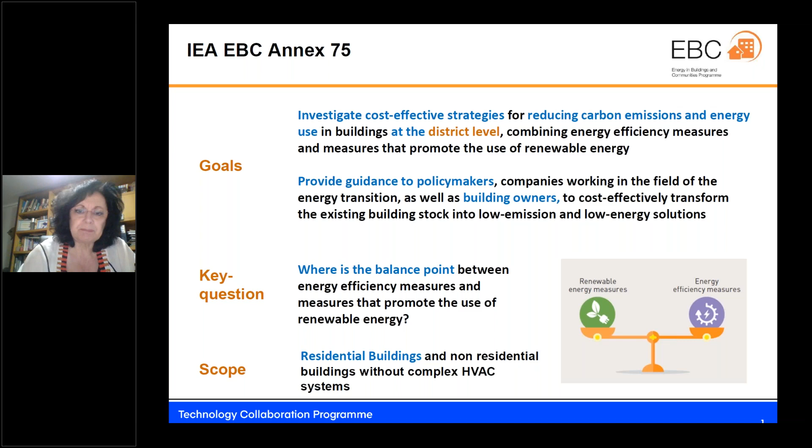Renovation at the district level can bring opportunities, but can also be very challenging when compared to building level. Finding this balance between renewable energy supplies and energy efficiency measures for the renovation of the existing stock is much more complex at district level than for individual buildings, but may also bring larger benefits. In this context, we thought it would be important to explore the potential of cost-effective renovations at district level to accelerate the transition towards low emissions and low energy districts.

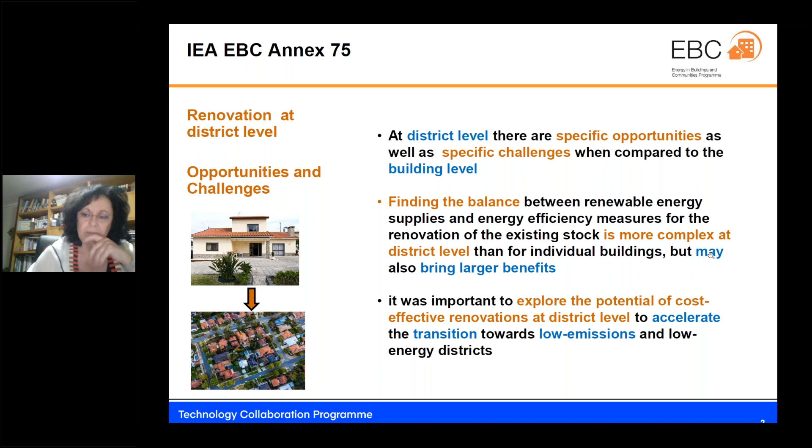With this in mind, we defined a few specific objectives: first, to give an overview of existing and emerging technology options for cost-effective renovation strategies. Also, to define a methodology supported by one or more tools to identify these cost-effective strategies for the renovation of urban districts, combining energy efficiency measures and renewable energy measures. Also to identify and document good examples, as well as explore case studies, highlighting the strategies for an effective transformation of the existing districts into low energy, low emission districts. And finally, our major goal to provide guidelines for policymakers and also for building owners and investors.

In the years we worked together, we produced 13 reports, and we have also developed a supporting online tool and an online interactive map where selected case studies are analyzed to understand the problems and opportunities faced in different district renovation processes. You can find all these reports and the tools on our website, so I invite you to visit this website and explore the different reports we have there.

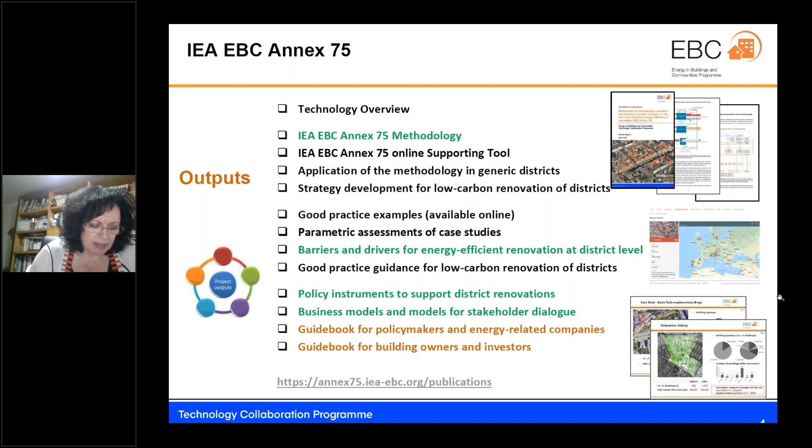The next speaker will be Romain Bolliger, who will talk about the methodology we developed in this project and its application to a case study. So Romain, please, you can proceed with your presentation. Thank you.

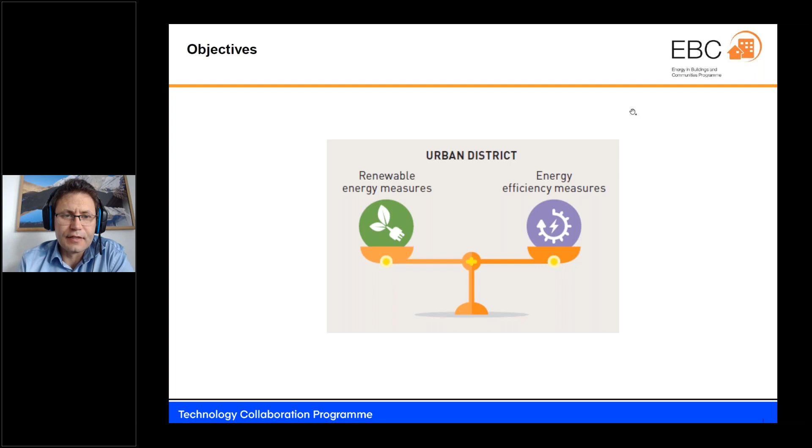One of the main points we were looking at in Annex 75 has been this balance between energy efficiency measures and renewable energy measures. In terms of research questions, it's specifically the third one in our list that we have been looking at: whether in district heating systems, the same level of efficiency measures make sense compared to individual heating systems. One could assume, for example, that since district heating systems have a large amount of fixed costs, it wouldn't matter that much how much we do on the efficiency side, so it could be assumed that in district heating projects there is less potential for energy efficiency measures.

We want to take a look at that more closely. Associated to that is also the question whether it makes sense at all to carry out district heating projects or district projects compared to individual building renovation projects in terms of cost effectiveness, and the larger question of what are cost effective combinations between renewable energy measures and energy efficiency measures at district scale.

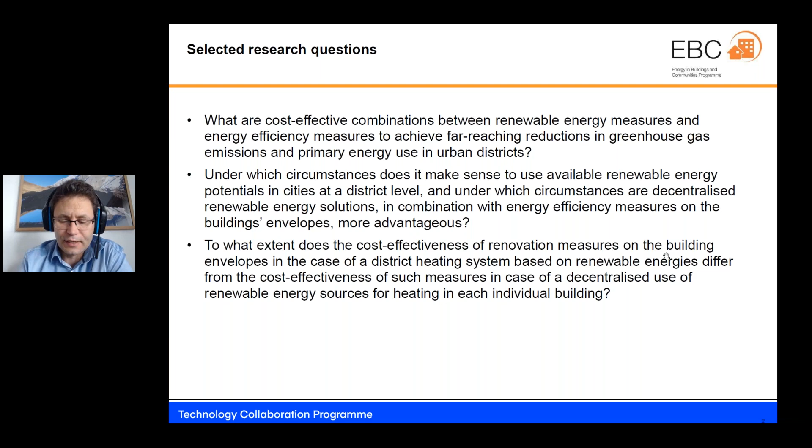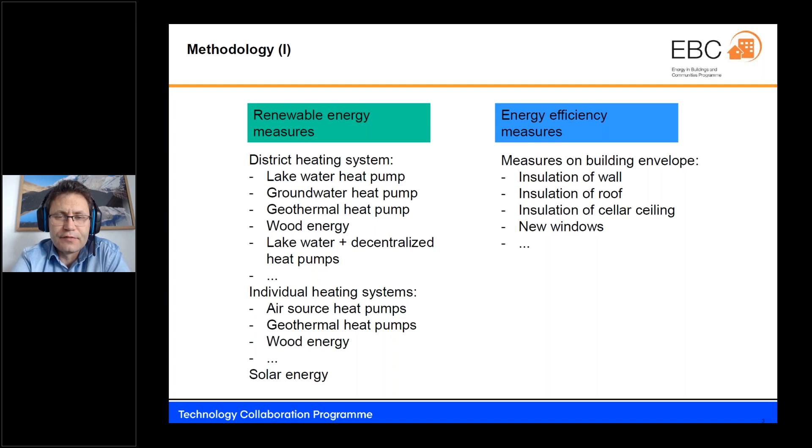To investigate these questions, we defined a set of measures, both on the renewable energy side and on the energy efficiency side. One important point to note is that when we look at cost effectiveness, it's important to always look at it in comparison with the reference scenario.

If we just compare before and after the renovation, we miss an important aspect, because even if we don't do anything to improve the building energetically, we still have costs in the so-called anyway case, just to restore the building's functionality. So when we talk about cost effectiveness of building renovation measures, it's important to note that not all of those costs are really necessary to improve the energy performance — some of those costs are already necessary just to restore the building's functionality. We look at cost effectiveness always in comparison with what would have to be done anyway.

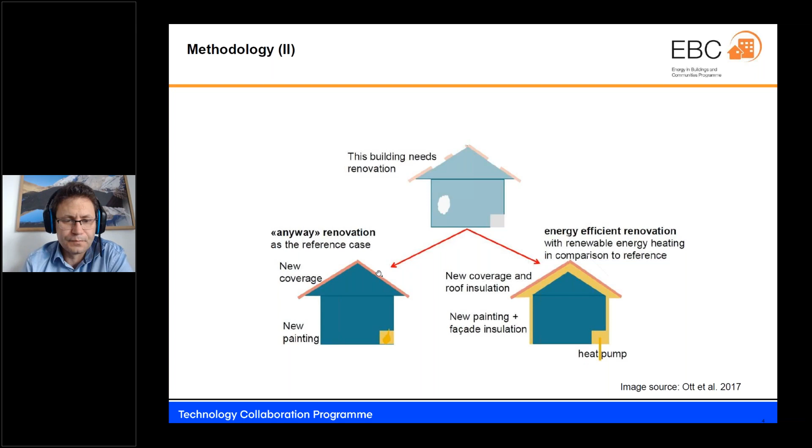When we look at the question of what elements a district heating system has in terms of how efficiency measures may influence the cost of the entire system, we distinguish four main elements: the heat source intake of a district heating system, centralized heat generator, pipes, distribution system, and individual heating substation, in principle.

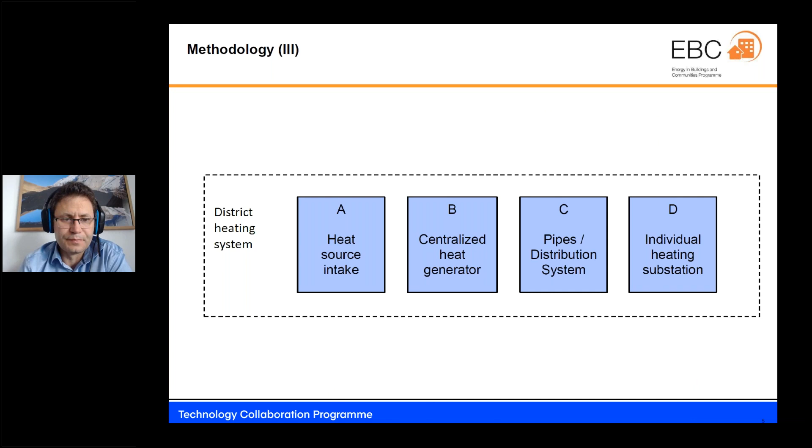There were several case studies carried out in Annex 75. Some success stories were also documented, and I'm going to talk now about one to illustrate the methodology, based in Lucerne, on a group of around 18 residential buildings.

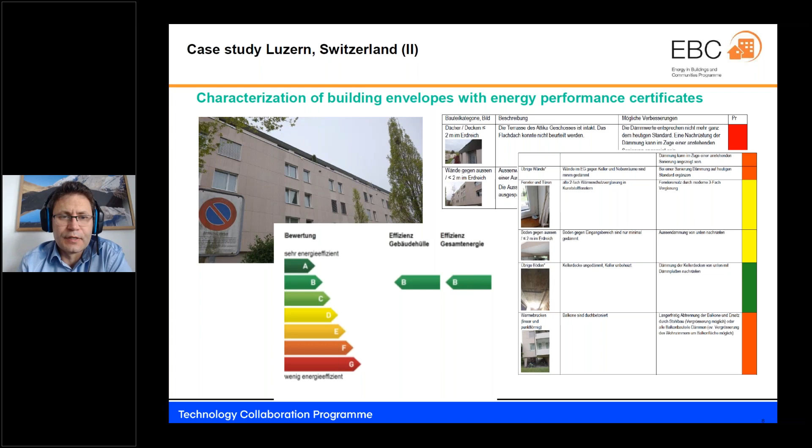When we were carrying out this case study, we started by carrying out energy performance certificates for most of these buildings, just to get a better understanding of their energy performance as a basis for further calculations. We were also obtaining cost data on energy and heating projects.

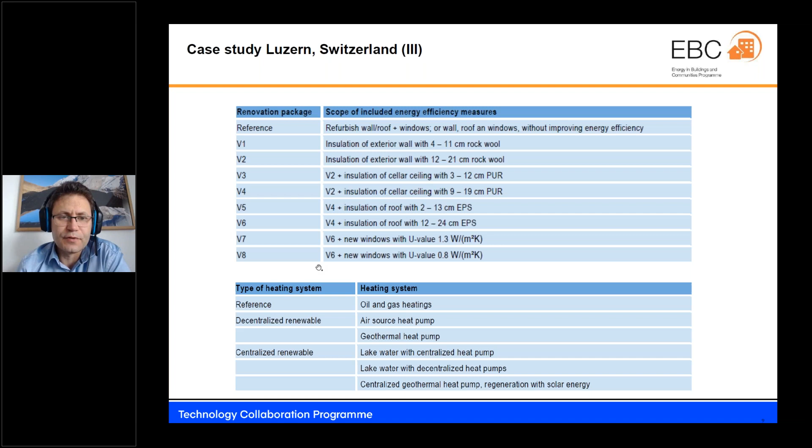We were defining various sets of combinations of energy efficiency measures on the building envelopes, ranging from just a reference case with only restoring the building's functionality to a comprehensive renovation package including windows, roof, cellar ceiling, or exterior wall insulation. We applied these energy efficiency measures to scenarios with various types of renewable energy systems, both centralized and decentralized.

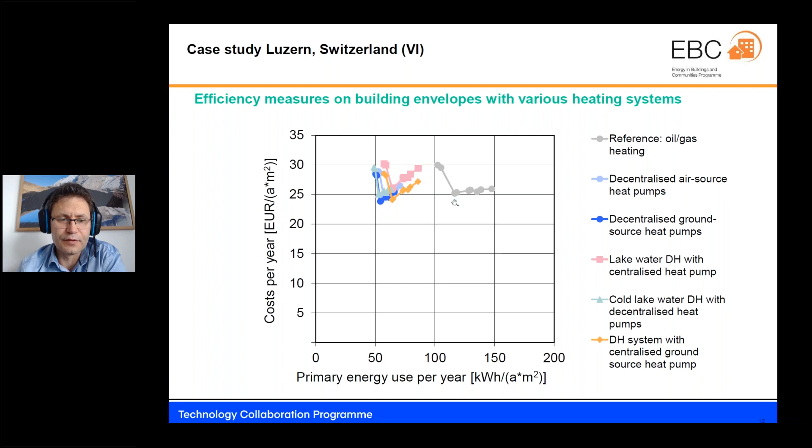This can also be illustrated in this type of graph, where the renovation package V6 remains the most cost optimal for various heating systems.

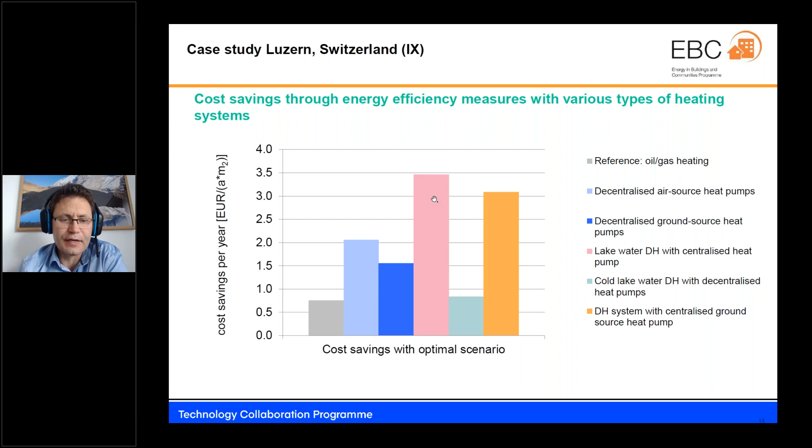We observed in this case study that lake water district heating with a centralized heat pump basically had the highest cost savings in terms of energy efficiency measures, higher than the reference case, but also higher than other renewable energy systems. This can also be seen in this graph when we have no efficiency measures on the building envelopes - the district heating system is quite more cost intensive than the other solutions. Yet if you apply efficiency measures, it becomes more leveled out.

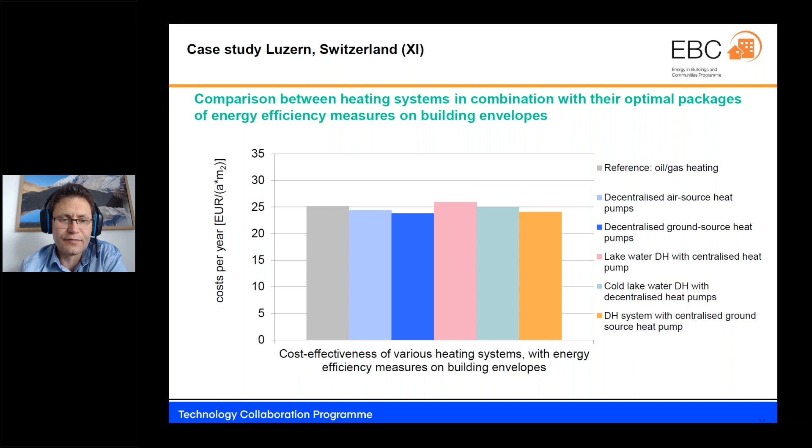So from this case study, the conclusion has been that for all investigated renewable energy systems, the energy efficiency measures on building envelopes are at least as cost effective as with a fossil fuel-based heating system. Moreover, for individual heating systems and for district heating systems, the same package of efficiency measures on the building envelopes is most cost-effective. The cost effectiveness of various investigated heating systems is relatively similar.

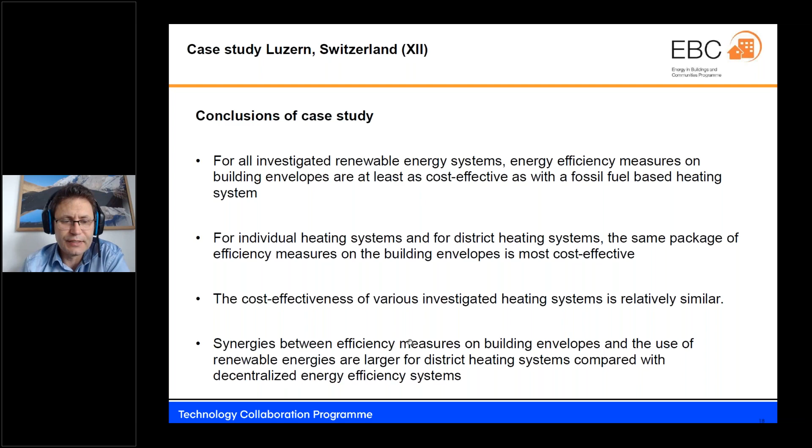We also saw in the graphs that there were some trends in this case study showing that synergies between efficiency measures on building envelopes and the use of renewable energies are larger for district heating systems compared with decentralized energy efficiency systems.

When we were looking at strategy development, we distinguished basically four questions that can be interesting to ask oneself when developing a plan for how to renovate a district. The first question is to take a look at the starting condition, whether there is already an existing heating system, centralized or decentralized. Then, what kind of production and distribution concept is foreseen for the new solution in terms of energy provision, then to choose the technology of the related heating or cooling system, and then also to ask oneself how much to carry out energy efficiency measures in association with the related heating system.

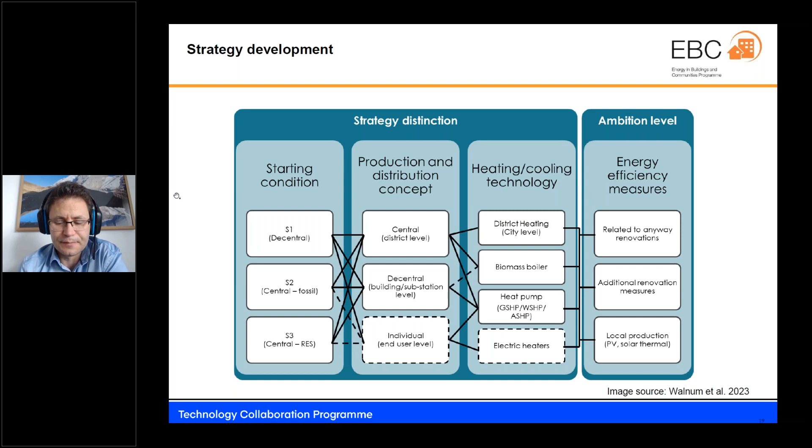Some selected conclusions for strategy development: first, there is no one-size-fits-all solution, so each district has to be investigated individually. The best solutions depend on the starting situation of the district, such as insulation levels and associated energy needs, the available already existing heating systems, and available energy sources.

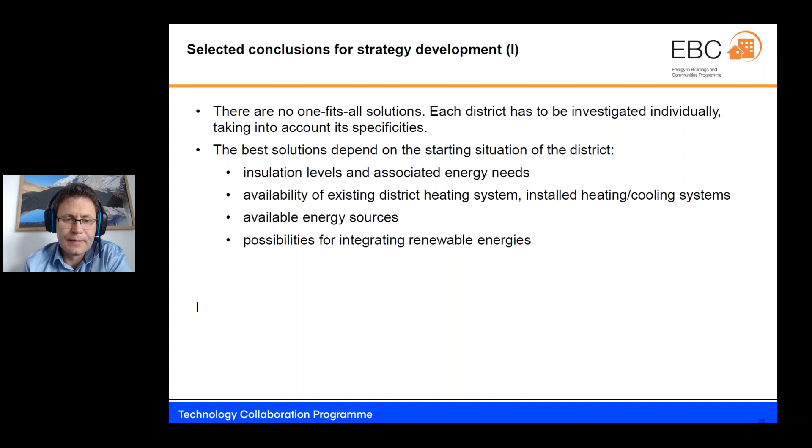In terms of the main question I mentioned at the beginning, the balance point between energy efficiency and renewables, we gave this recommendation: energy efficiency measures make a lot of sense also with district heating systems. There are synergies available, so it's not the case that energy efficiency measures don't make sense at district heating level.

So there are a lot of synergies, and one important factor is that the temperature of the district heating system may be lowered if energy efficiency measures are carried out, which doesn't only reduce losses in the system but also allows the centralized heat pumps to run much more efficiently if the temperature can be lowered a little bit. They already are not so efficient because the temperature is relatively high in a district heating system, as it has to accommodate all types of buildings. Yet by carrying out energy efficiency measures, it's possible to reduce that temperature level, and this can be quite an important factor.

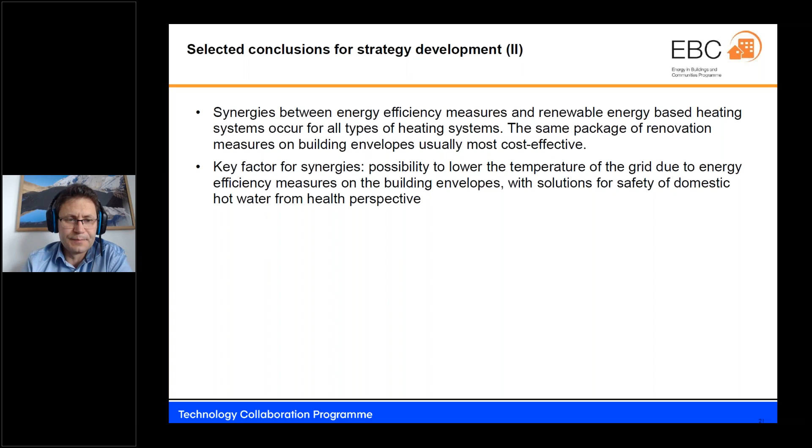With regard to the other point I mentioned, whether it makes sense to carry out district heating projects at all, we saw that the difference between renewable energy systems at district level and at individual level are quite small. We also have to take into account that there are a lot of risks involved in district heating projects, because a lot of upfront investments have to be made, and it's not clear whether the project is going to be successful. So there is no clear economic case often for district heating projects.

On the other hand, we identified a lot of other good reasons to carry out centralized projects, for example, to make use of a large heat source or seasonal thermal storage, to have more flexibility, to reduce the burden on the electricity grid, or to provide a heating solution to buildings for which it is difficult to switch to renewable energies, for example due to noise or space restrictions in cities. Yet these additional benefits are mostly like public interest benefits.

So one main conclusion has been that if policymakers want to make use of the related benefits that district projects bring, policy action is most likely to be needed to make such projects happen, because the market all by itself is unlikely to deliver district solutions to a large extent.

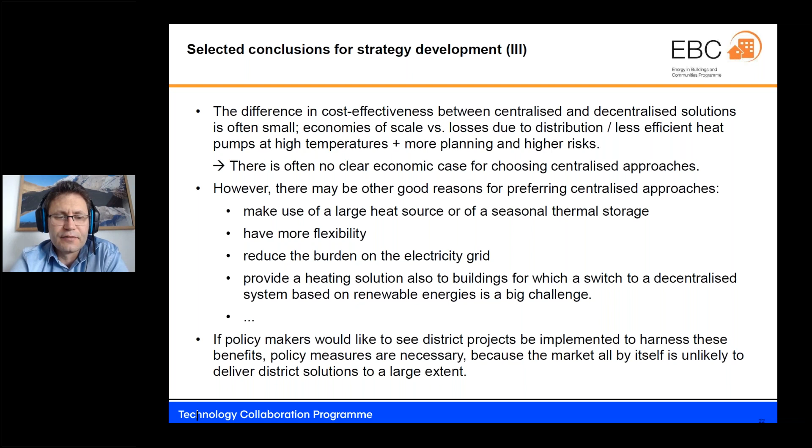This brings me to the end of my presentation, and I gladly hand over to Erik Johansen from Sweden.

Thank you, Roman. So I will continue and talk about the barriers and drivers for energy efficient renovation at district level. In this part of the research, we looked at a few research questions related to energy efficient renovation at district level: what are the main barriers and drivers concerning this, what barriers must be overcome to achieve successful renovation, and what are the most important drivers enabling renovation?

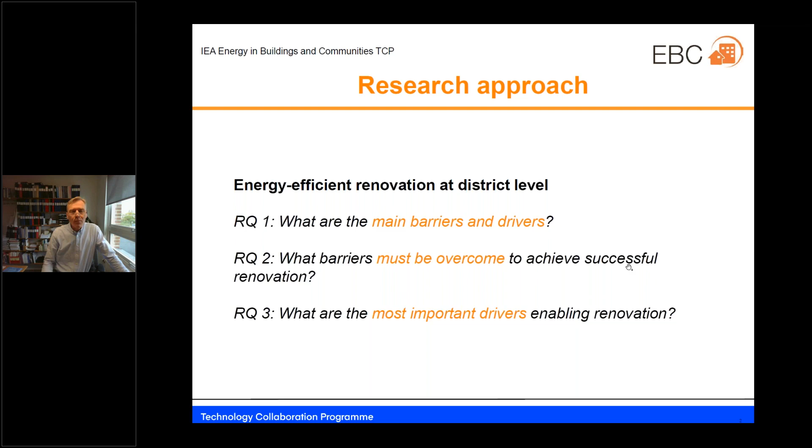We did an analysis of 15 success stories, which were recent renovation projects at district level, and we also conducted 38 interviews with different stakeholders within the annex. As Manuela mentioned in the beginning, several European countries were involved in this study, representing Northern Europe, Central Europe, and also Southern Europe, so it's quite a good spread over Europe.

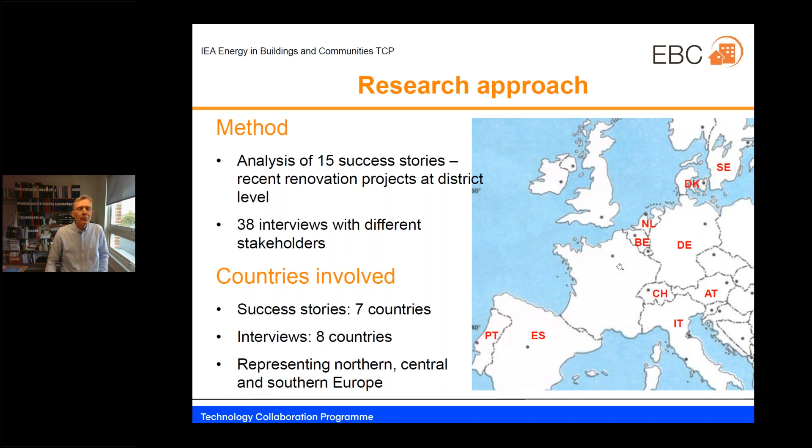The type of stakeholders that were interviewed were policy actors, so authorities, public agencies, etc., renovation solution suppliers, energy solution suppliers, clients and beneficiaries—which included investors, residents, as well as homeowner and housing associations—financing intermediaries like banks, real estate developers, and also what we call other intermediaries, including neighborhood associations, consultants, and lots of other stakeholders.

And the barriers and drivers that were found could be divided into different categories: policy aspects, legal aspects, economic aspects, social aspects, communication, technical aspects, and finally knowledge and training. So we'll go through the results here when it comes to barriers and drivers, starting with the main barriers.

If we look at policy aspects, we could find that there was a lack of synchronization between authorities at local, regional, and national level. Local authorities often lack financial and human resources and technical expertise. This is especially true for small municipalities. It is often difficult for municipalities to influence private actors and homeowner associations.

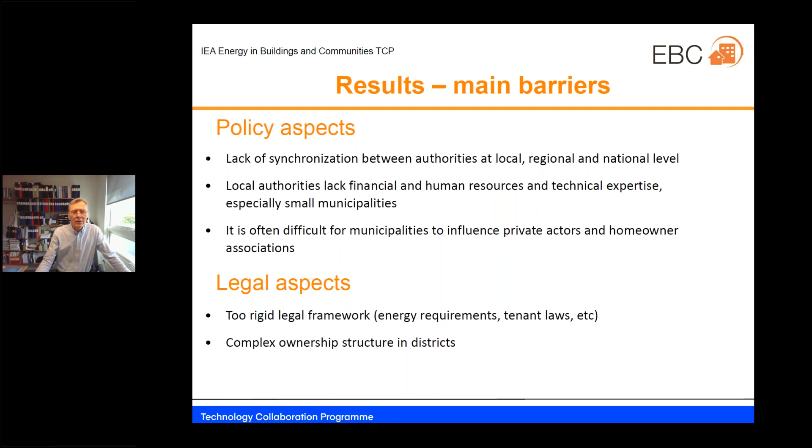When it comes to economic aspects, one barrier was the lack of financial incentives, especially at district level. Another barrier was the lack of financial support to low-income people, which is a vulnerable group and difficult in district renovation. And also that private homeowners do not want to take loans.

For social aspects, one barrier was the risk that low-income people need to move from the district, so this vulnerable group is very sensitive, for example, to increases in rent, which may be a consequence of the renovation. Another barrier is the lack of trust in authorities and other actors involved in energy renovation.

When it comes to communication, a barrier there is the poor dialogue and coordination between stakeholders, and also lack of adequate advice and guidance.

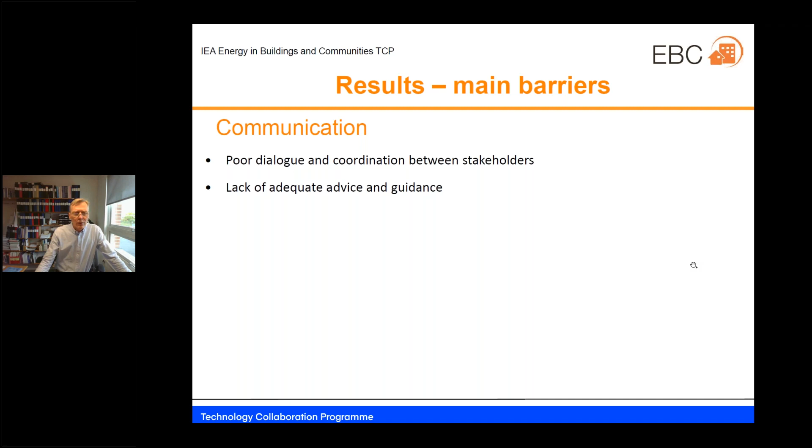When it comes to technical aspects, a barrier is the difficulty for residents to switch from individual to centralized installations, and also that there is a great variation in the technical condition of the buildings in the district.

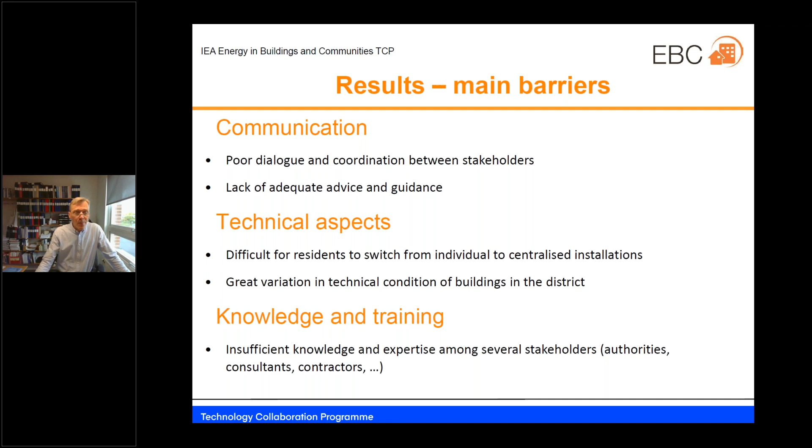And finally, when it comes to knowledge and training, one main barrier was the insufficient knowledge and expertise among stakeholders, including authorities, consultants, contractors, etc. Those were the main barriers that were found.

And moving over to the main drivers, starting with the policy aspects, it was found that local authorities and municipalities can play a decisive role as drivers in the process.

They can, for example, act as coordinating actors to reach many stakeholders. They can develop visions, energy strategies, and tools. They can organize consulting and awareness campaigns. They can improve the outdoor environment in the districts. They can facilitate necessary permissions, like building permits, and provide funding frameworks for homeowners and housing associations.

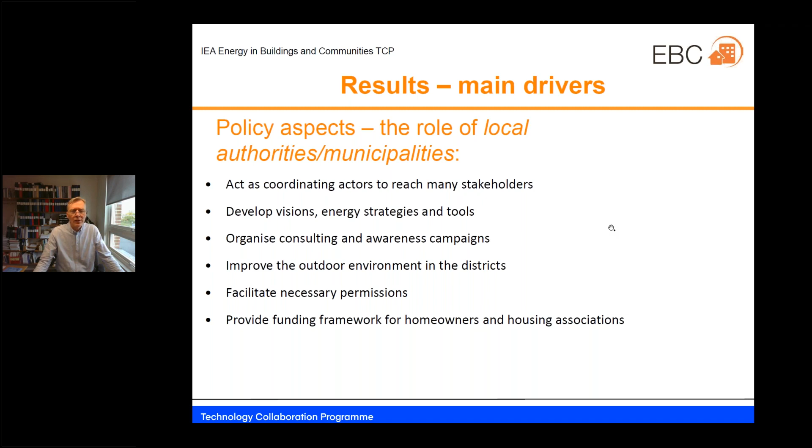As for economic aspects, the use of bank guarantees and revolving funds could be an important driver, as well as economic incentives to encourage a shift to carbon-free energy.

Another driver is financial help, special financial help to low-income groups, and also the change from individual heating of each building to district heating, which is related to economy of scale.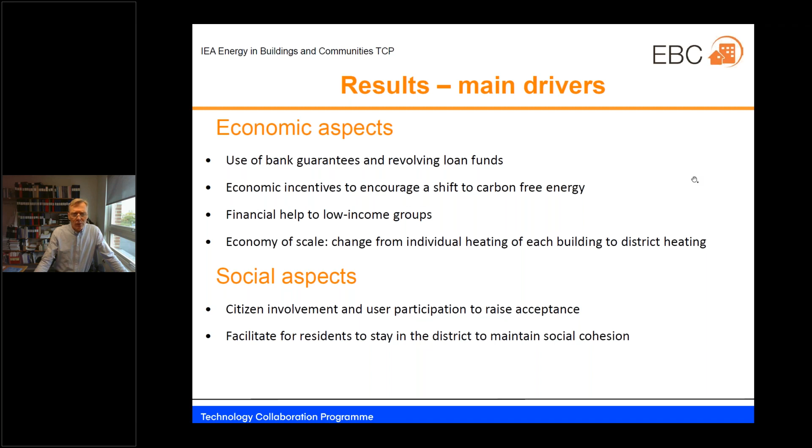And as for social aspects, an identified driver was citizen involvement and user participation to raise acceptance, and also to facilitate for residents to stay in the district in order to maintain the social cohesion in the district.

When it comes to communication, the main driver was found to be that advice and guidance to involved actors during the whole renovation period. A good stakeholder dialogue throughout the project, for example through thematic workshops, and a good dialogue between the local authorities and citizen groups in order to build trust.

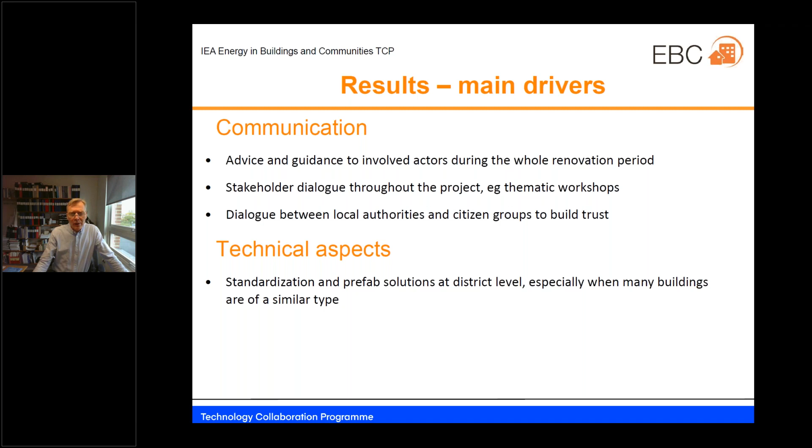Of the technical aspects, an important driver is the standardization and prefab solutions at district level, and this is especially important and possible when there are many buildings of the same type.

And finally, when it comes to knowledge and training, a main driver was the training of key actors involved in different parts of the renovation.

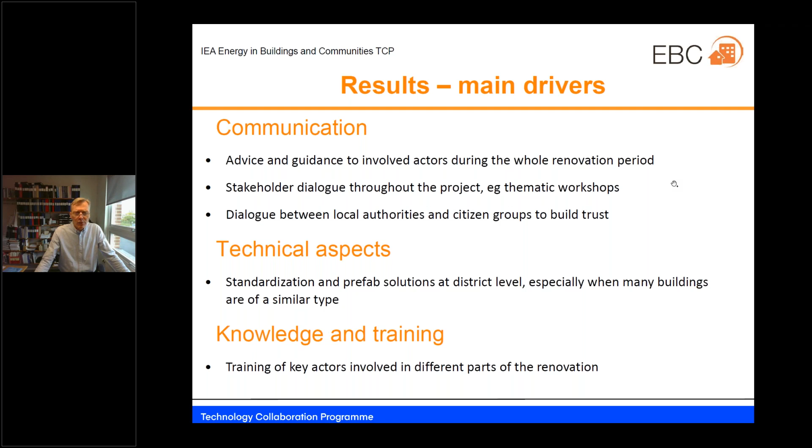So to end here with some recommendations and conclusions that were found from this study about barriers and drivers.

It's recommended to have a holistic approach to district renovation, so combining energy renovation with upgrading of the district, for example improving outdoor environment and social infrastructure. This will help to create trust in the renovation process of the district.

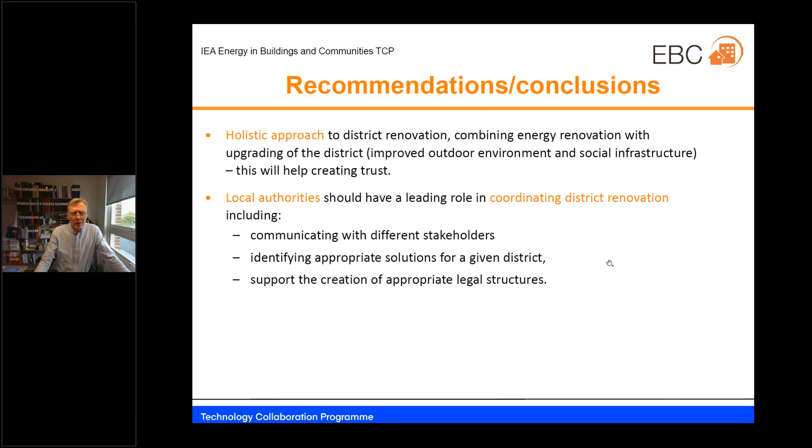It's also recommended that local authorities should have a leading role in coordinating district renovation, for example communicating with different stakeholders, identifying appropriate solutions for a given district, and supporting the creation of appropriate legal structures.

Another recommendation is that public housing associations, in cases where they exist in the country, can play an important role in the energy renovation, especially if the municipality has ambitious goals when it comes to energy efficiency and the use of renewable energies.

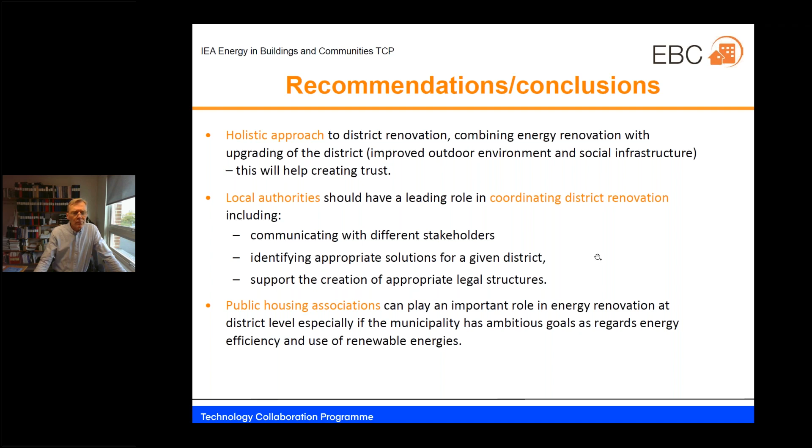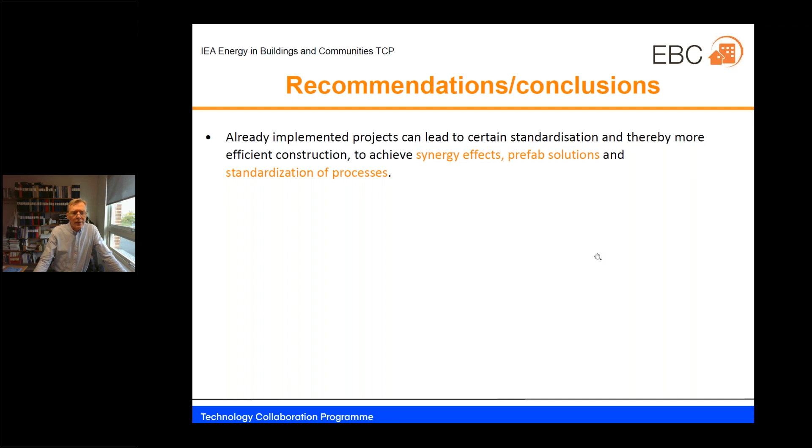Another recommendation is that already implemented projects can help in identifying certain standardization and thereby more efficient construction, in order to achieve synergy effects, prefabricated solutions, and also standardization of the processes.

Finally, best practice examples constitute a good way to encourage the spread of renovation at district level. This can be either by starting with a single building and upscaling it to the whole district, or spreading good district examples to other districts. One could also include learning from one country to another when it comes to best practices.

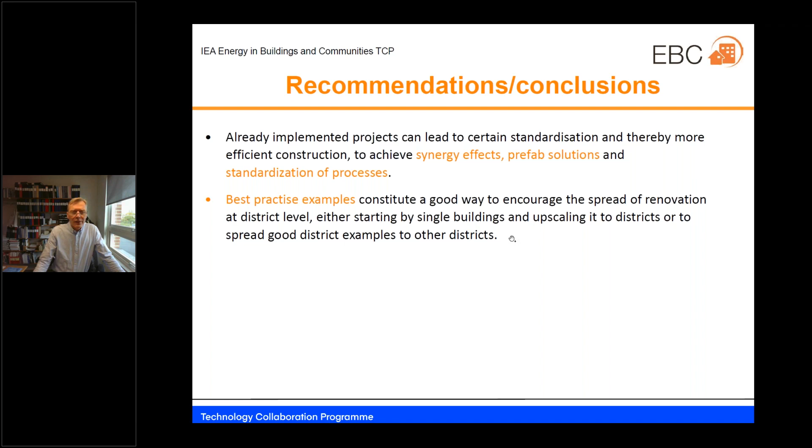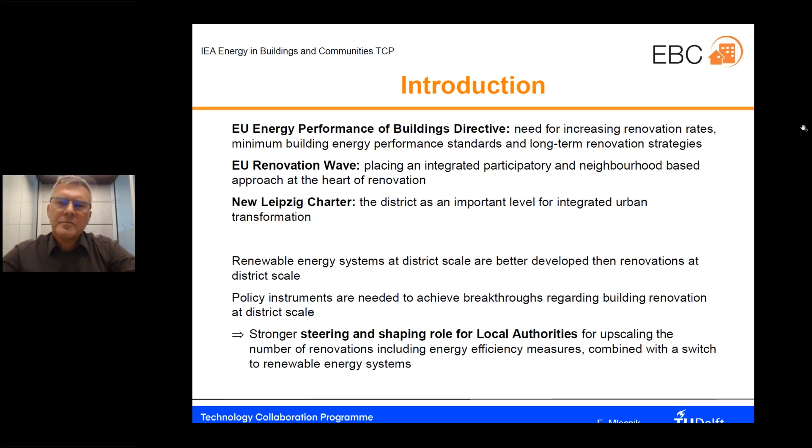So in this work, we have been focusing on the policy instruments. The question was: how can policies, especially those deployed at local level, increase residential building renovation and renewable energy systems at district levels.

This report is structured in various parts. First of all, there is a catalog of possible and available policy instruments. There are results mentioned from interrogations during workshops and during in-depth interviews in eight countries.

There's a part that deals with a quantitative assessment on the degree stakeholders think that proposed policy instruments can be useful, important, and easy to implement. And there's a qualitative assessment, especially also looking at country differences and lessons from other countries.

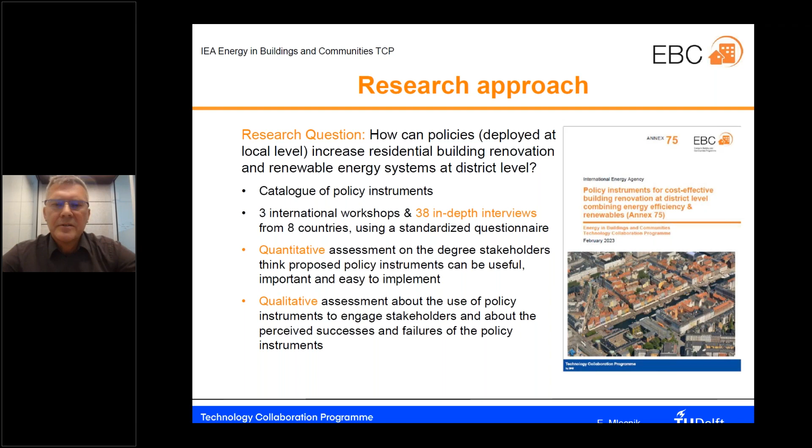Coming to the catalog of policy instruments, usually we think about sticks and carrots, regulations and incentives. So these were also detected, but besides that, there are other categories of policy instruments that become very important, such as planning and tendering for districts, organizational instruments, communication instruments, and other emerging initiatives that might help district development.

Regarding regulations, it would be possible to enforce minimum energy standards in districts. However, this can be very complicated and it's not a very popular measure for politicians to do. There can be inspections and audits in districts, especially when there's a concern about livability in a district and the quality of social housing. There might be financial incentives created by local authorities for districts as a supplement to existing national incentives.

But let's maybe focus more on the other instruments that are interesting. So I will give one example of a bottom-up approach and one of a top-down approach, looking at how we deal with this in the report, systematically describing barriers and opportunities related to each policy instrument.

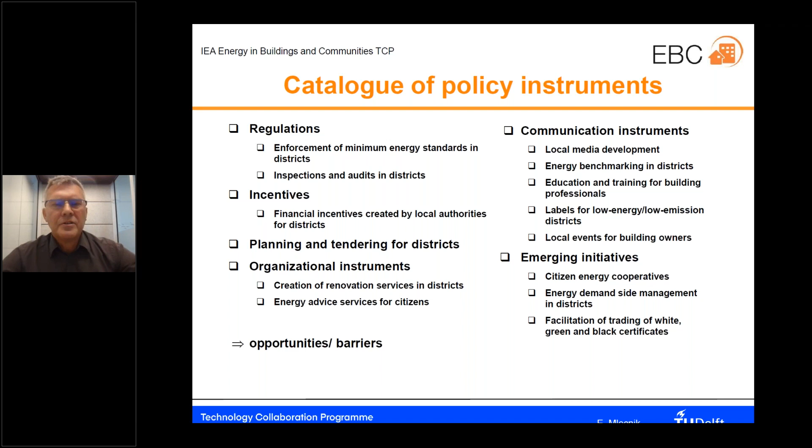For example, a top-down approach, local authority planning, actually has a great opportunity to combine the energy efficiency issue with the development of energy grids at the same time. However, most of the heat plans being developed now do not take into account energy efficiency of the buildings. Neither do they have obligations to go to low temperature heat grids, for example.

A big advantage could be that there's professional top-down planning with experts. On the other hand, participation processes are still needed to gain acceptance within the neighborhood. There's an opportunity for performance-based tendering to specify the energy performance of a district, and with such planning, there might be a good legal basis to start actions.

On the other hand, there are still barriers, as Eric also mentioned. There's also a gentrification risk. Once we start renovating a district, people might move to other districts, and we can lose the social cohesion.

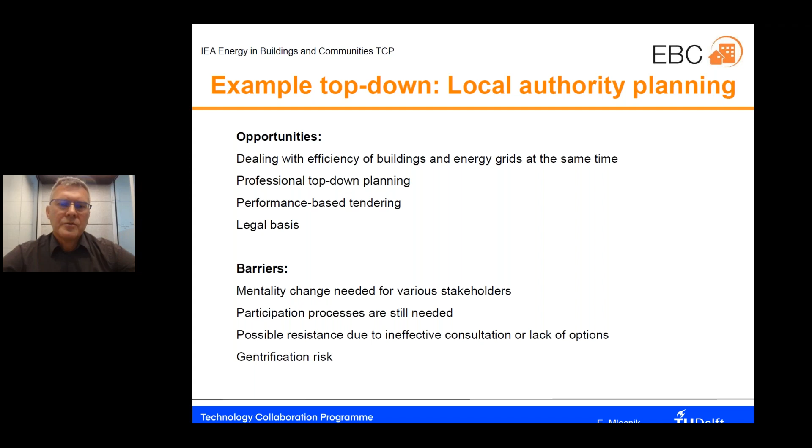To give an example of a bottom-up policy instrument: developing a consultancy desk in a district to give energy or sustainability consultancy. The big opportunity is that you can really focus on engaging citizens and unburdening homeowners. You can target multiple owners at the same time, while gaining the trust of these owners with independent advisors or people from the neighborhood itself giving the advice.

There's an opportunity to raise individual awareness and provide easy access to solutions for individual homeowners, and an opportunity to create alliances on the local level, also for supplying renovation and energy solutions.

On the other hand, it can be very tricky for a local authority to procure such a service, like an advice desk. Tendering processes are quite experimental, and the activity itself can be very labor intensive.

Another barrier is that the service does not necessarily target a specific district or customer segment. For example, there might be a general consultant who is not specialized in legal issues of condominium associations.

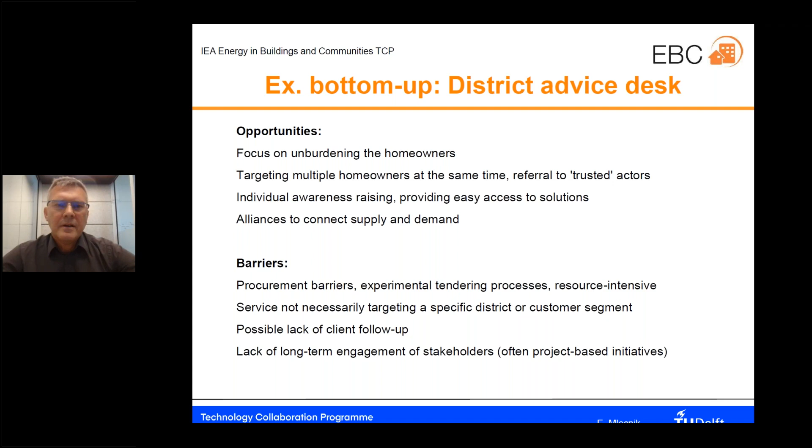This is how we deal with these issues in the report from the catalog part. If we look at the quantitative analysis in the report, we asked about policy instruments similar to those mentioned in the poll, asking if interviewees were using these instruments, interested in them, thought they were important, and thought they were easy to develop or implement.

The interviewees were all experts in their field, experienced with some aspect of district renovation. 62% had direct experience, 72% valued the policy instruments as important or very important, and about 25% considered them easy or somewhat easy to implement. So the problem here is that while most of these instruments are very relevant for targeting district action, they might be difficult to implement.

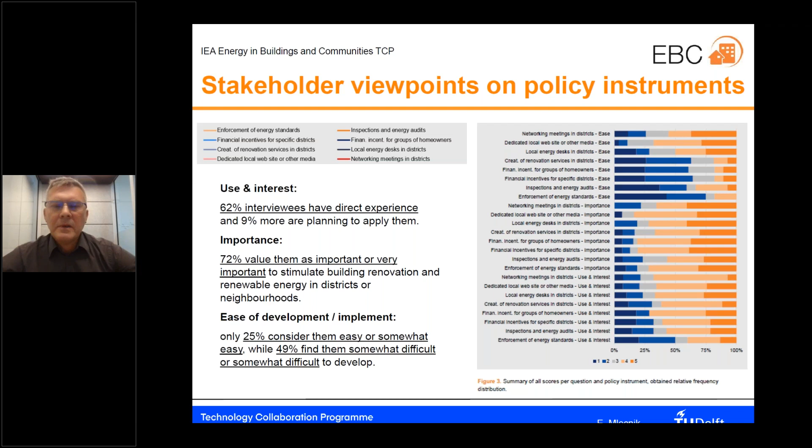We also found a difference in opinion between policy actors and non-policy actors. Here you can see on the x-axis eight policy instruments we focused on, and the importance rating. The orange line is the importance rating by policy actors, and the blue line by non-policy actors, mainly market actors. You can see that policy actors are more inclined towards the easy measures, such as developing websites or communications.

They find these more important, while market actors really emphasize that obligations are also needed. So inspections and energy audits are found more important by non-policy actors than by policy actors.

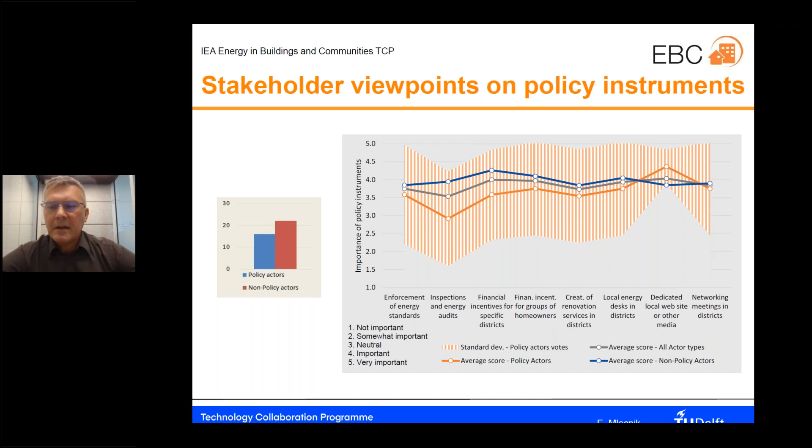The last part of this report is about a country discussion, and there we can clearly see that countries can learn from each other's successes and failures. We have good examples and also less successful examples we can learn from.

For example, in Austria there are district management offices that can take care of energy-related renovations, a nice example in Vienna. In Belgium, they had experience introducing a financial incentive for neighbors to renovate together. However, this did not lead to the expected outcome that people in the same street or district would also apply for such a grant.

In Switzerland, there are interesting examples of cantonal subsidies as well as obligations for switching to renewable energy-based heating systems, and also voluntary energy performance labels such as Minergie and the 2000 Watt areas that can inspire further policy development.

In Germany, we found the KfW (Kreditanstalt für Wiederaufbau) grant very interesting, which specifically focuses on urban development of districts, and we found that many local authorities use this grant coupled with regional and local add-ons and incentives.

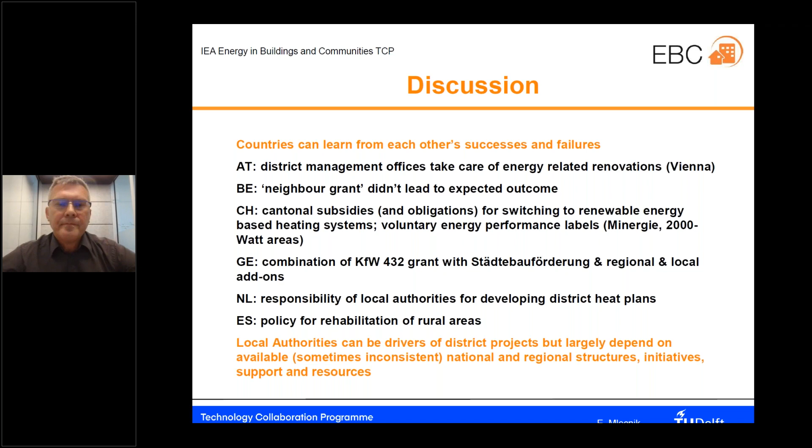That brings me to my conclusion. We found in the policy studies that the district scale approach can lead to upscaling of energy renovations, but it comes with important local and social challenges that can be addressed with various types of policy instruments.

This report gives a nice overview of possible policy instruments that are generally considered useful and important for accelerating building renovations at district scale, especially when looking at the combination of energy efficiency and renewable energy systems.

So we would like to suggest putting emphasis on making local implementation of these instruments easier, to make sure national policy alleviates possible barriers, especially for local authorities, and that local authorities can be empowered or unburdened somehow. Especially smaller local authorities don't have the necessary resources and people to cover district renovation, so there's a need to provide unburdening.

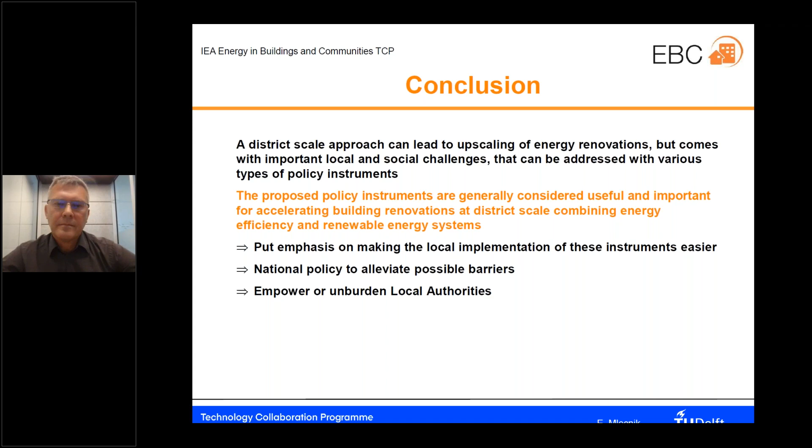So thank you. This work was supported by many people, and thank you to all the Annex members who participated with the interviews, and all the workshop participants who provided interesting information. The related paper of this work also got an outstanding paper award, so you can look into the paper for more information. Thank you very much.

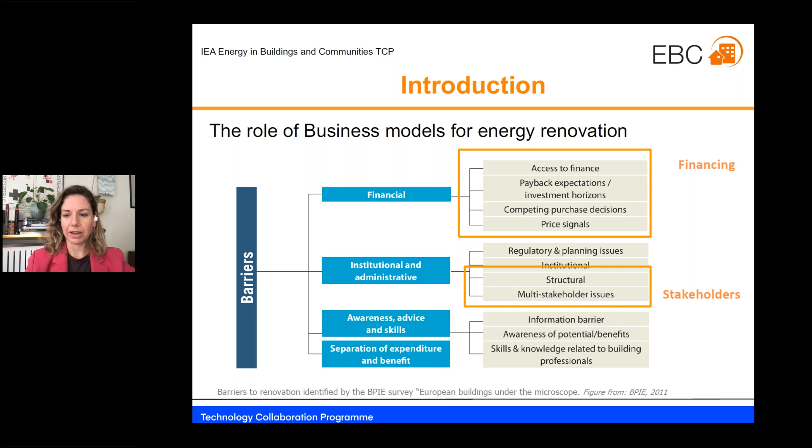So with that in mind, the goal of this part of the Annex was to find the key characteristics of business models that are important in order to upscale from building to district renovation, and also incorporate renewable energy sources. Also to gain insights about the opportunities that different stakeholders have within those business models in order to support implementation, but also the stakeholder dialogue - how all the people involved can communicate to overcome barriers such as fragmented and complex stakeholder structure.

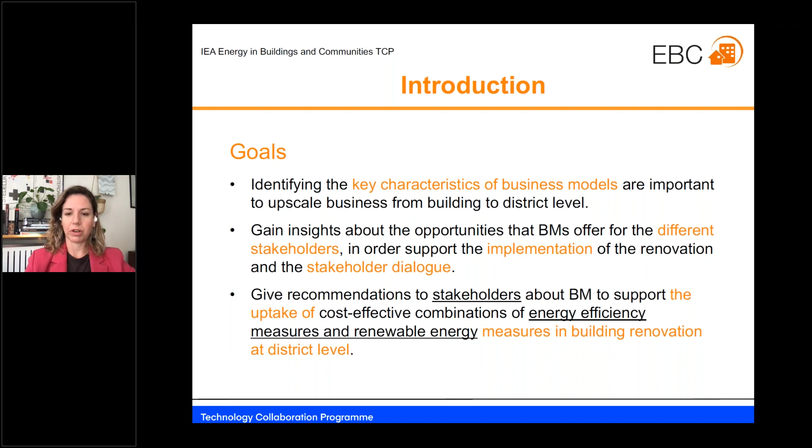And then also, in the end, give recommendations to stakeholders - which we can see as policy actors and non-policy actors - regarding the uptake of cost-effective combinations that go to district scale.

So the research was centered around these research questions: which are the current practices for business models, for both renovation and energy supply, that are applicable to district renovation; which are the main stakeholders and what is their role; and how can we combine energy efficiency and renewable energy sources.

And then which are the business model characteristics in order to upscale - those characteristics relate to the value they offer, which are the beneficiaries, the clients that use this value, which partnerships are necessary in order to deliver that, and so on.

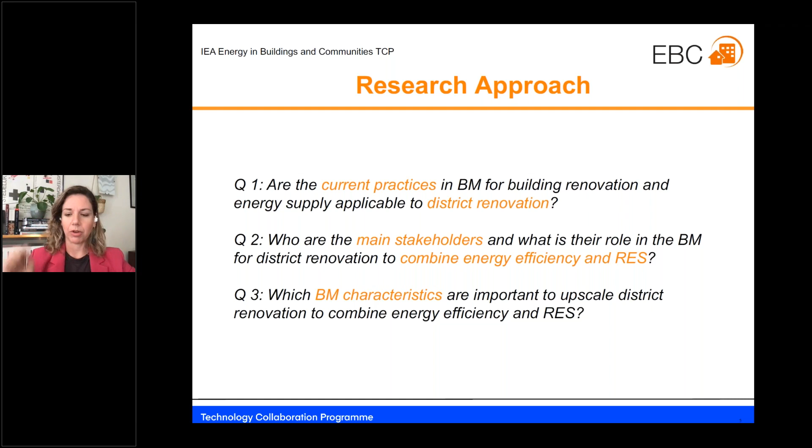So the first step was to make an overview of the state of the art, which we call a catalog of business models. I'm not going to go into detail now, but what is important to keep in mind is that we look at energy efficient renovation and energy supply business models separately, because they differ considerably.

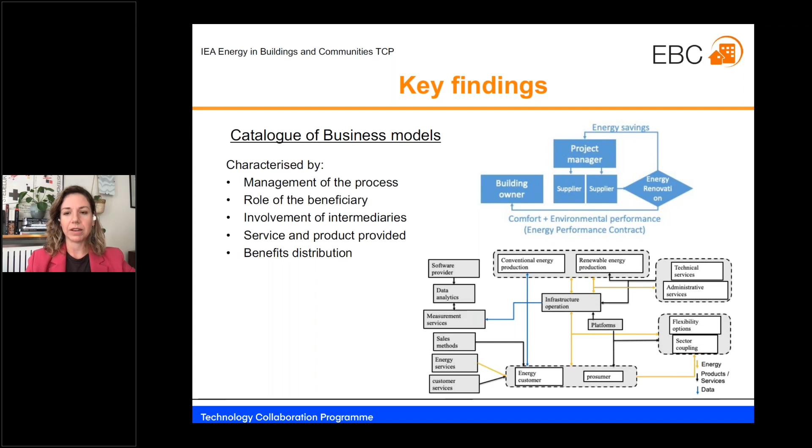They are characterized by how the process is managed, what is the role of the beneficiary, if there are other intermediate actors involved, which is the service and the value that is provided, and how this is distributed in terms of cost and revenue.

And then once we had this overview, we tried to see which are the key considerations in order to be able to combine renovation and energy supply. And the first thing is to understand the stakeholders who are there, so we had the stakeholder mapping.

Looking at how we can combine those stakeholders into innovation clusters, particularly the ones providing this service, and how these clusters and partnerships can create value - to whom, so who is the customer segment for that, and what is also the main driver.

And then next to that, once we had this overview, we also asked the stakeholders about their opinion - which of the current practices are good, how can we go further with regards to the business model, which are the characteristics and which are the opportunities for upscaling. This last part was based on the interviews that both Eric and Erwin mentioned, which included questions particularly with regards to the business model and its characteristics.

So some conclusions I would like to share today: looking at the current practices, one thing we can see is the fragmentation between energy supply and renovation solution suppliers. They normally approach the business in separate ways and don't necessarily interact, at least not at a large scale, which is a challenge but also a possibility for new kinds of companies to offer that. What is also important looking at current business models, if we want to upscale, is having a single point of contact for all project needs, including the technical solution, financing solution, communication, and so on.

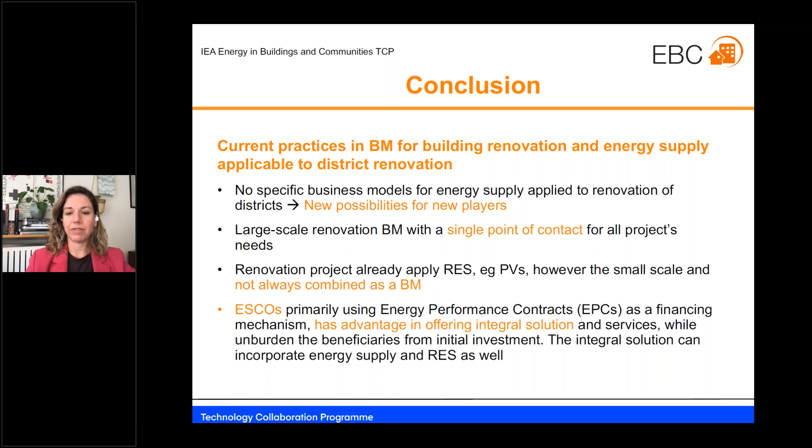Renovation projects currently do apply renewable energy sources like PV, but generally at small scale, and it's not always part of the business model. It's a solution that is provided, but it doesn't constitute part of the whole value and revenue this activity offers. Energy service companies that use energy performance contracts as a financing mechanism have an advantage when offering such integral solutions, and also relieve the beneficiary from initial investment. That's something we need to keep in mind going forward.

Energy suppliers are also a decision maker, not always. We saw that this depends a lot on the context and specifics of the project, but they do have some influence. Intermediaries are normally present in the process, but their influence is not very high in the sense they cannot really take the decision. Other intermediaries are consultants or those that organize the process. And of course, the influence of financial intermediaries is quite high.

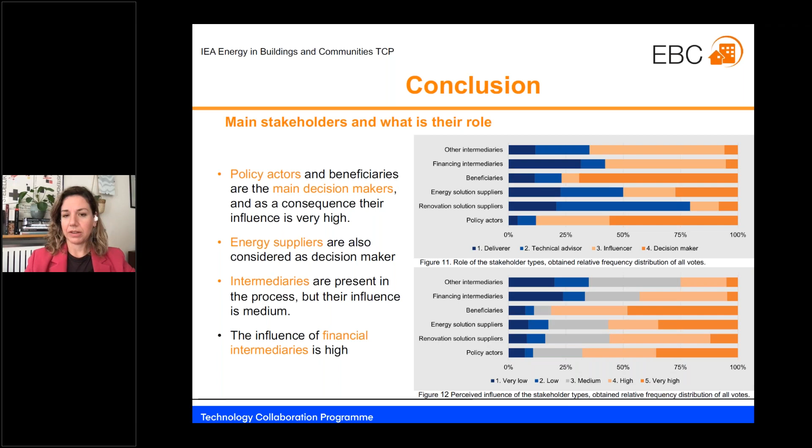In terms of characteristics a business model should have going towards district scale, it's very important that we look beyond energy efficiency, and we should also see the additional values in terms of district quality. That's also something Eric mentioned as part of the main drivers, but that's something we can take into the business model and the value we are offering.

Having one point of reference is important to help all the residents, and that also answers a little bit the question we had before about how to deal with the fragmented ownership. So this is something that could help. Including services like communication and financing next to the technical solution is important. Looking especially at the energy supply, we should also see the role of the prosumer as a beneficiary, not only as somebody that sells energy to the grid.

So combine this role. With regards to partnership, both renovation and energy actors are important. That's not happening as much yet, but that's a direction we need to go if we are to offer an integrated solution. Policy partners are very important and should be involved. That's something we saw in the previous presentation, because they also help with communication, but also in building trust. We do need innovation in the business model, in the partnership, as a way to manage the whole part, not only providing the energy or the technical solution once.

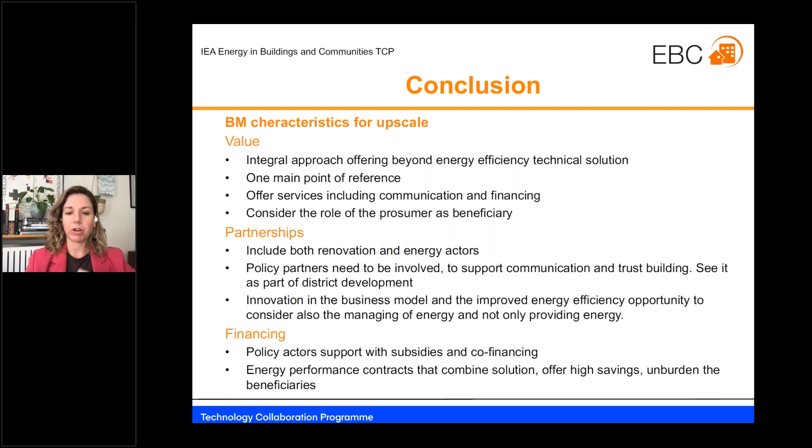Going to recommendations, particularly with regards to policy actors, it echoes a bit what was discussed by Eric as well. We need to find possibilities to combine renovation with other qualities and public interest in the municipality. That's why it's important that we have those actors in the process, and they also support with subsidies, which is important, while offering guarantees and increased trust. So they do have a role there.

Nevertheless, the people that would actually realize these solutions and own this business model are the non-policy actors, particularly the market. They have the chance to do innovation and sector coupling, particularly with regards to energy renovation. And the value they need to offer is not only the technical solution, but also support during the process. It's important to have a long-term relation with the beneficiaries, especially for energy performance contracts.

Because we need longer periods in order to have an effective cost and revenue structure. They also have the chance to realize other measures beyond energy efficiency, which means they need partners in their partnership that are able to deliver more value, especially when energy companies need to be a big part of this dialogue and those partnerships.

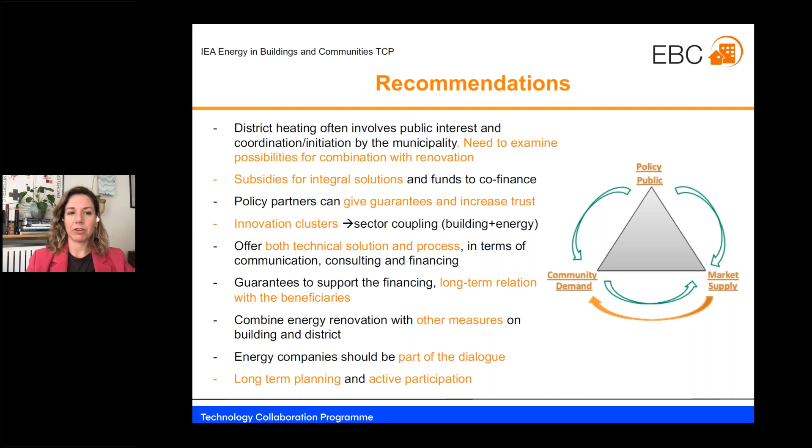After this overview of some specific topics dealt with in this project, I will now show you the main findings, conclusions, and recommendations that emerged from this project.

Annex 75 is framed by current global concerns related to the decarbonization of the economy, meeting climate goals, and promoting the energy transition. In this context, and in the building sector, there is an urgency to accelerate building renovation rates towards decarbonization.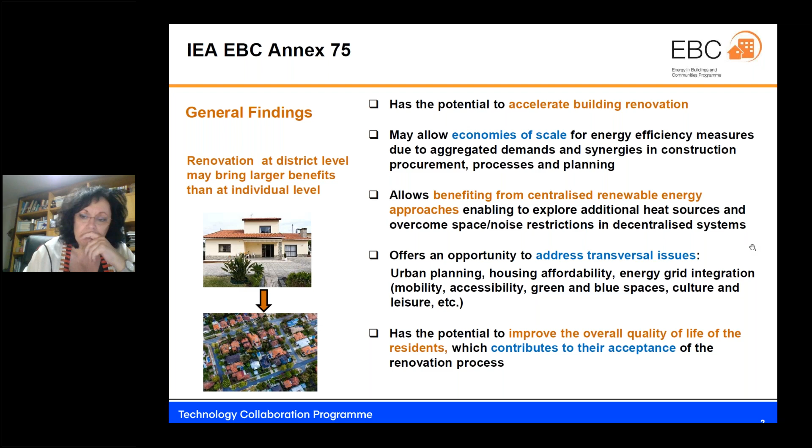Renovation at district level is also challenging, as the synergies between energy efficiency measures and the installation of renewable energy systems at district level may be significant, but they are difficult to achieve, as they entail an additional level of complexity and depend on the synchronization of the building renovation.

Sorry, it disappears from my screen. Okay.

Districts are also complex structures with several actors involved, and sometimes these actors have conflicting goals. At district level, coordination and communication are crucial, as already my colleagues said before. Building renovation at district level is associated with high upfront costs and long payback time, and also high risk of not being implemented due to a potential withdrawal of some building owners that are at different stages.

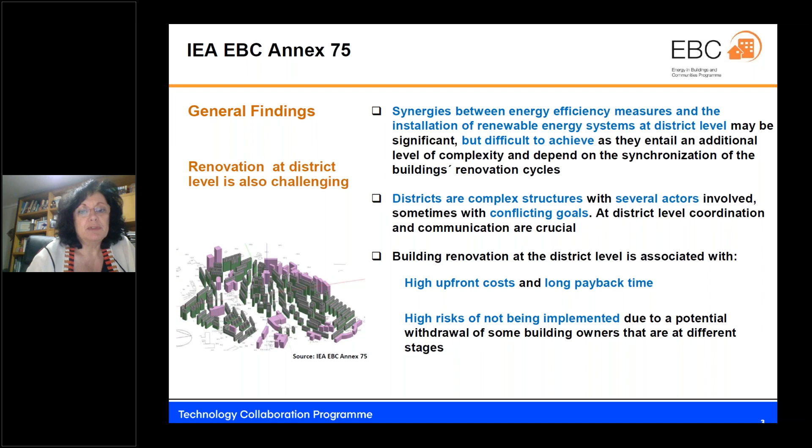As main conclusions, we may say that there are no ready-made or one-fits-all solutions. Each district has to be analyzed individually, taking into account its specificities. The best solutions depend on the starting situation of the district, like the insulation level, installed heating and cooling systems, available energy sources, and the possibilities for integrating renewable energy.

Also, the co-benefits or additional benefits in the renovation process should be considered when deciding on the best solution. Another important conclusion was that not just technical and economic aspects matter in a district energy renovation. Social, legal, and planning issues are equally important, and communication with different stakeholders is crucial. Another conclusion is that policy measures are necessary to make use of opportunities offered by district projects, as very often they are not more cost effective than single building projects.